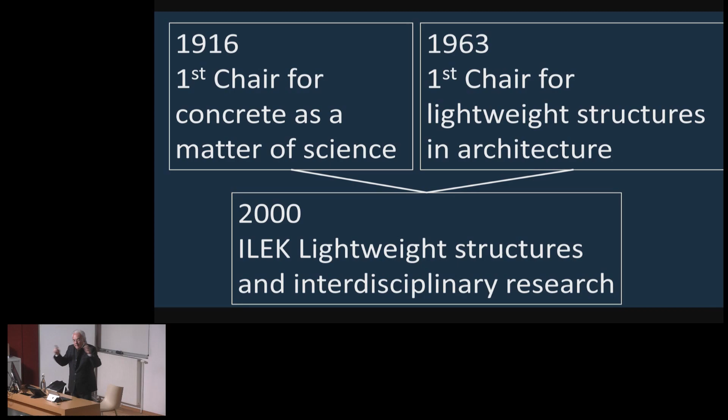It was lightweight, interdisciplinary teams. And what we came up with is the lightest structures you can imagine. These are only a few slides. This is concrete, and the diameter of the holes is maybe 3 to 6 centimeters, and the thickness is 1.5 centimeters. And this is spanning over 6 meters. Super light. You cannot go below that lightness.

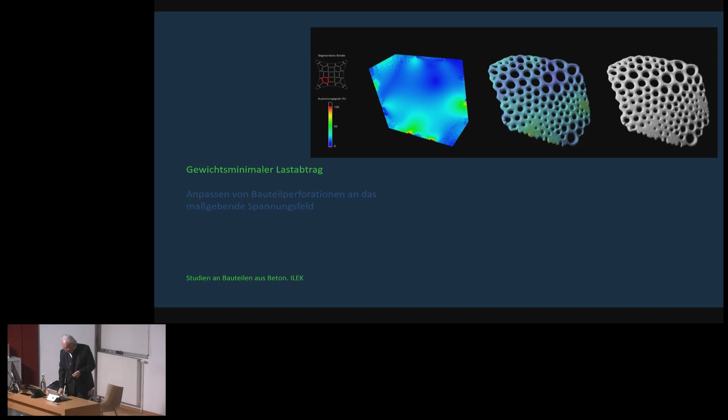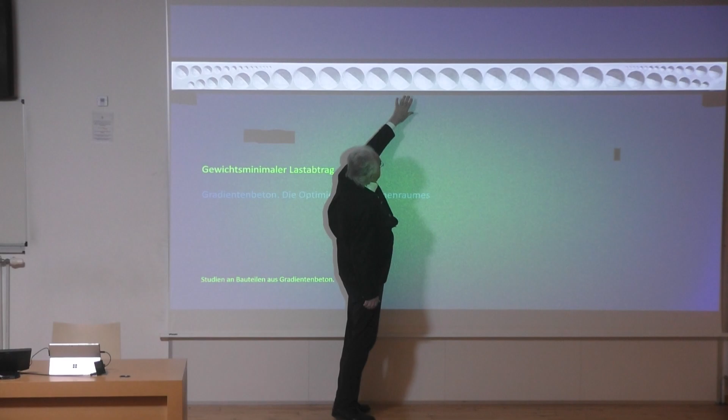Take the idea that there is no material where there is no stress. And then we have a regular slab, for example. So this is, in reality, spanning from here to there about 6 meters. And it's obvious if you have a support there and a support on the other side, that then the highest compression is at center and the highest tension is here. But then the flow of forces changes and the stress level changes.

So we invented holes in a concrete element, but of course no holes produced with inlays of plastic, because recyclability was always a headline. We always design things so that they are 100% recyclable. So we had to invent sculptures, forms made of mortar or cement, which we then lay in the formwork, then we pour the concrete, and the result is then this.

This is 40% of the weight of a regular concrete slab. It is 10% thinner and has the same load-bearing capacity. So it is simple and easy to save half of the material compared to what we find somewhere else. So it is in detail many tests in reality, but if you have these, in that case spherical bodies, you can do them like potato bodies, whatever you want. We made it simple in the very first steps and made it spherical.

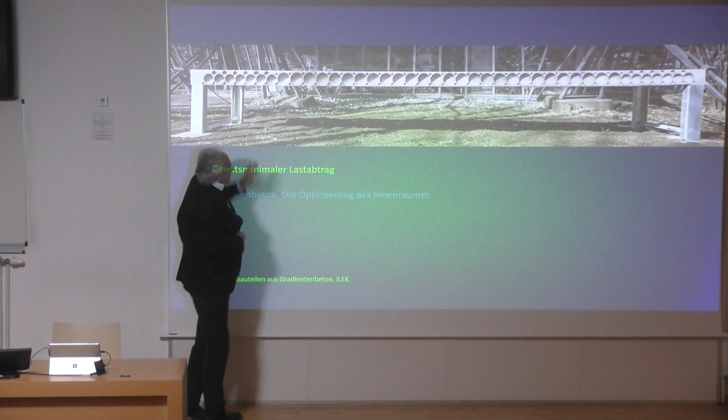But if you have a spherical situation like here, the question arises, what is the densest type of packing of spheres? And then you end in very deep mathematical problems. It's the theory of packing spheres. This is an example. So we need the influence of mathematicians in our research,

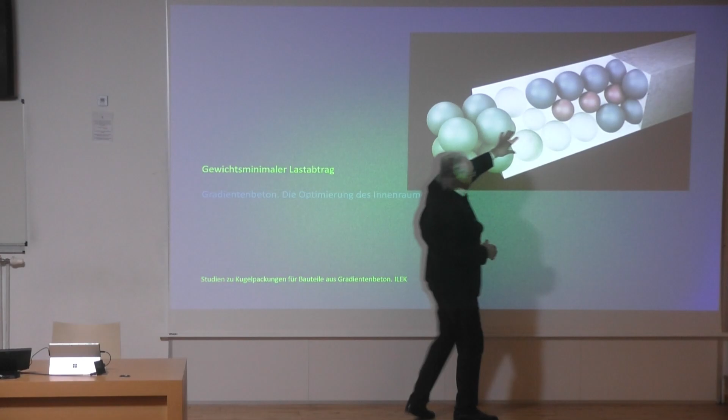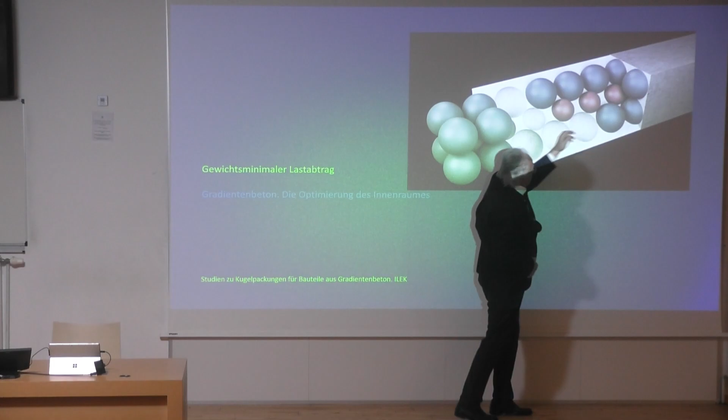and our doctoral students do models then, numerical ones, digital ones, and real ones, in order to understand how we can pack different diameters of these concrete hollow spheres so that later on they form a hollow piece inside, for example, a girder or a plate or whatever.

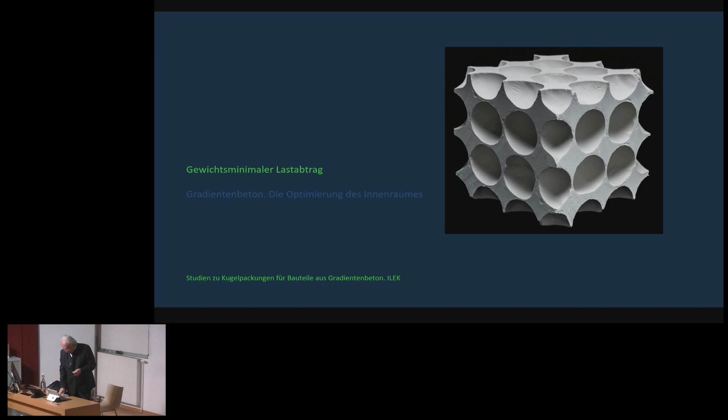And if you cut out of such a concrete element a part like this and give it to a structural engineer and say, okay, this is what we invented, could you do a calculation following the code? Then it might be very difficult, definitely. But we also developed the technologies to do so. So we had the idea, we developed the technology to produce it, we developed the technology to calculate it, and now it is applicable. And we applied it for different buildings in the meantime.

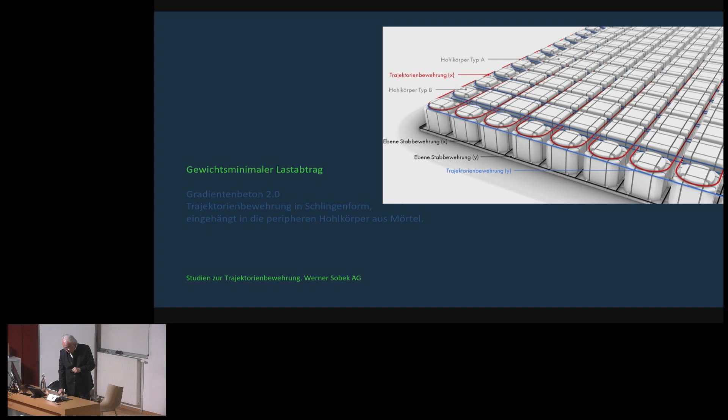This is just a shot in order to show you that these bodies do not have to be spherical. They can take any shape which is a sense-making shape. And then I come to an end in introducing you to the way we thought at ILEK. Imagine if you have, for example, an arch under its dead weight. It's very simple to define the shape the arch should have, so that it is an optimum shape, an optimum geometry.

But if you make the arch thinner and thinner, and if you have an asymmetrical loading, the arch is going to collapse. So this non-symmetrical loading, which is causing buckling and large deformations, is typically the design problem for the engineer, not for the architect. And what do they do? They add mass. They say, okay, if under dead weight the arch is thin, but under unilateral loading it buckles away, then we have to add weight and material so that it stays stable. And this is why many arches are so thick.

Now I said, this is the traditional solution. Never believe the traditional solution. There must be something else. And I said, if we would have a technique which bends the arch in this direction, exactly at the point in time when a unilateral loading drives it to this, then the natural deformation, which is this, and the artificial one superimposed by Werner Sobek, which is this, the sum of both is 0.

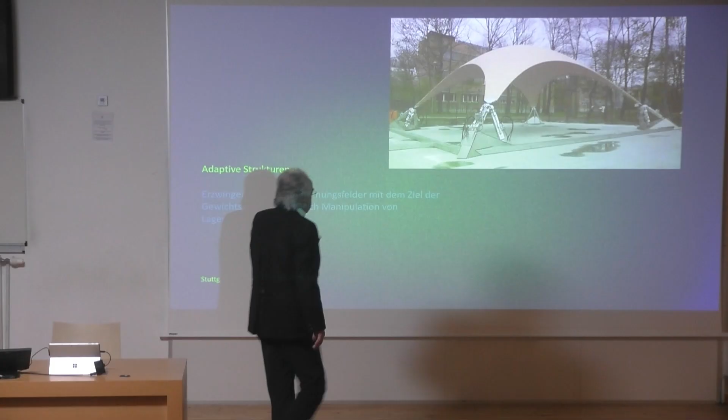So imagine, this is from here to here, it looks scientific. From here to here, 10 meters, each of the supports. So the diagonal is 14 meters. This is from here to the wall at the end. And the thickness is 4 centimeters wood. Regular quality. And indeed, it stands still under its dead weight.

And as soon as we have a unilateral snow load or wind, it would break. It would fail. So what we did is, we had about 10 or 15 tiny sensors below, and these measure strain gauges. They measure the deformation, why the thing is starting to move. From the deformation, we calculate the stress field, which is going to happen. Then we create artificially an anti-stress field, which is causing this, and the sum is 0.

And the anti-stress field we are causing in order to drive it to this direction is by moving these points, the support points, by a few millimeters in the X, Y, Z direction. Under standard condition, this wooden shell would have a thickness of 24 to 30 centimeters. Introducing our technique, we drive it down to 4.

Means we save 80–85% of the material, and we replace the material we saved by energy, which we need from time to time when the snow is falling in a non-symmetrical way to move these support points. But the energy we need is very small. It is very small. So what we did is we replaced building with material by building with energy.

This does not mean that you now should design every one of your buildings with an energy mechanism. I'm telling you that story to make you open in your thinking, that it is not about just adding material when it becomes critical. No, sometimes it is much better to take material away and replace or solve the problem with something different. And this very often makes a lot of sense.

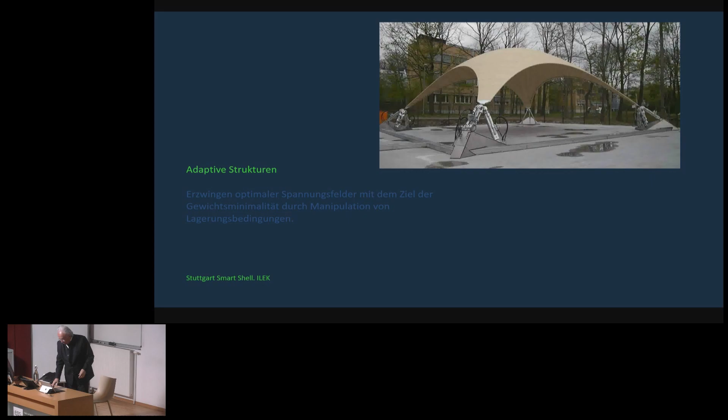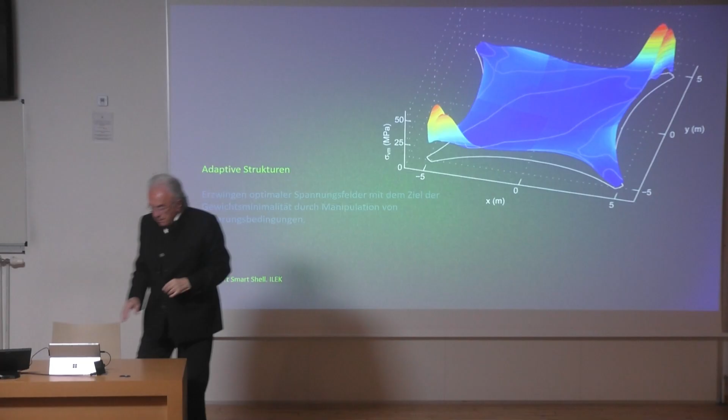Now the problem is by moving these support points a little bit to dampen this stress field and to make it very, very homogeneous, and this is what we do here. So putting a little bit of energy to move a little bit of support point, and the problem is gone. This is not only academic.

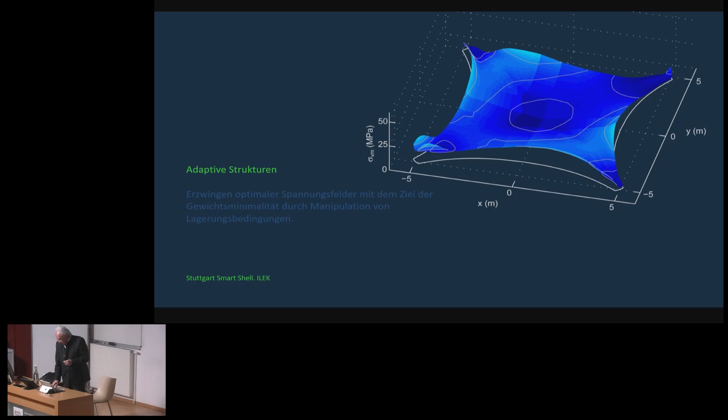As Mark told you, I'm an architect and an engineer, and many projects I'm doing, I need to combine those two things in order to come to a solution. So one of the famous buildings I designed in the last years is this. Now you have to imagine this is 250 meters high. And what is it made for? The building also goes 50 meters down into the soil. So it's a vertical stick of 300 meter length, and it is used to develop and to test high-speed elevators.

Elevators which do not have a counterweight. Because if you have an elevator and a counterweight, you have a lot of material to transport it. It's very heavy, blah, blah, blah. So we said, if the counterweight is the problem, no counterweight. But how can you do a cabin of an elevator without a counterweight and without these long cables? You need to remember the magnet train technology, where the train is running on a track without touching the track.

So we transferred, not us, but ThyssenKrupp, the technology of the magnet train to the vertical situation. And now the cabin is running up and down without touching the shaft of the elevator box, just by electromagnetic issues. So now the following thing is, when they want to get a certification, for example, in France to sell their elevator there, then they typically have to get a certificate by a couple of specialists.

They come to the place and then they want to see the elevator running, they do their measurements, and finally, after doing all these tests, you get a certification to use it in France. But most of these tests are in a still standing tower. Now, if this tower is moving due to wind action, you cannot do the tests. You have to pay all the specialists, but they cannot run the tests because the tower is moving.

So what we did is we remembered the shell, we remembered this action, and we said, okay, in order to keep it away from moving, we can make the tower super fat and super heavy, or we manipulate it. So what we did is, here in a height of 200 meters, inside there's a steel block, 200 tons of steel, which is hanging on a cable, and there's two high-speed electro engines which are capable to move that slightly, only slightly. And we move it in that way, like a pendulum, that this makes the tower standing still.

So we save endless material because we can design the tower very soft with a little material only, and the huge deformations that would occur under wind loading, we dampen them down to zero with this action. Adaptivity is how we call that.

Now the thing happened when everything was done, the ThyssenKrupp engineer said, this is a great idea, we really loved it, machine engineers, so permanently smelling like machine oil, etc. White-faced because they are always working in their laboratories in the darkness of the elevator shafts. And then they said it would be great to set the tower into swinging so we can test the elevator even under earthquake conditions. And then we found out that this is doable, of course. We just have to move that weight in a way that the tower starts swinging.

Then the engineers of my company, they went to the administration of Rottweil, this is where the city said, we need an additional building allowance. We are now starting to make the tower swinging. And this is the first tower in the world which might destroy itself if the software does not work. So this made then the people in the administration white-faced. They said, we don't want to have this. So we had to convince them that it really works, etc.

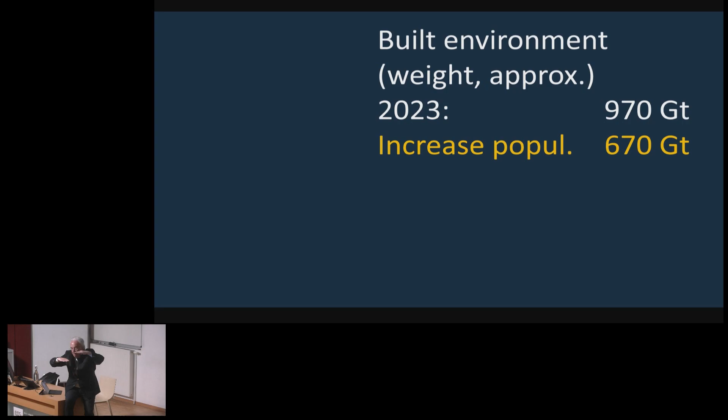That means you have to build the difference between 75 tons per capita in the global south and 330 in the industrialized countries. So if you take that difference and multiply it with 6.6 billion, then you come to the number which I call catch up. This is 1,700 billion tons.

So if you add that up, that would mean if in the year 2050 everyone would like to have the building standard of a Western country, then you would have to build the existing world 2.3 times in addition.

You don't need to study mathematics to do these calculations. You have to ask the right questions. Nobody told you this. I asked the question, why? No scientific magazine is talking about it. And this is so simple. Just multiply the need of material or the need of food with the number of people and compare it to what exists. And then show the difference to what is needed. And then you become much wiser.

So this is how we work at ILEK. We talk to population researchers. We say, are these numbers right? Are these wrong? What is your estimate? We talk to material scientists, to economic people about what the industry is producing in building materials in China and Japan, somewhere else. And then we add all these numbers up and we come to these conclusions.

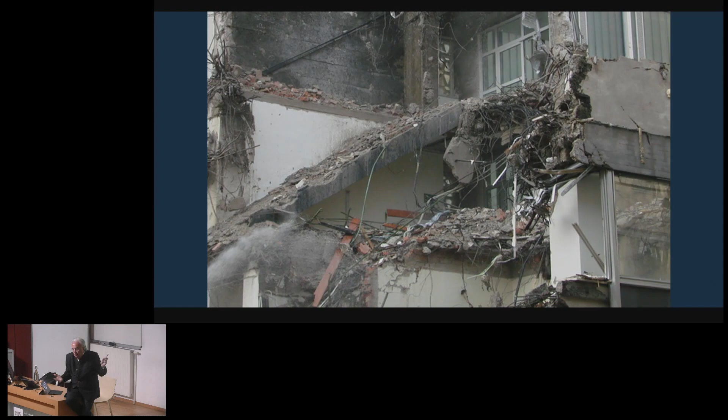You learned already a lot about this, as Mark Hyman told me, about avoiding this waste. How can you avoid this waste? There are two simple techniques. Not to tear the building down, to reuse it, or to build in a way that this type of waste does not occur, meaning in a recyclable technique. I call that compose and decompose. Bring the different materials together in a way that it is easy to decompose them and then to recycle the different single quality materials. But if everything is bonded and glued together like here, recyclability is more or less zero.

So not tearing the building down, reusing it, is something we did relatively often. Especially when it comes to a weapon factory where they produced munition. Me being an anti-militarist, it was quite clear that I had a lot of fun doing this, and we turned this weapon factory into an institution of arts, a school, the Center of Arts and Media in Karlsruhe. So not tearing it down, reuse it.

And the idea of recycle means build in a recyclable way, which we typically do not. The car industry is obliged by law in Germany that their cars have to be 80%, 85% recyclable. They started doing this in the 80s of the last century. The building industry has no idea how to do that. Therefore, we started already 30 years ago to plan buildings and build them in a way that they are recyclable. Exactly with these techniques: easy to compose and easy to decompose.

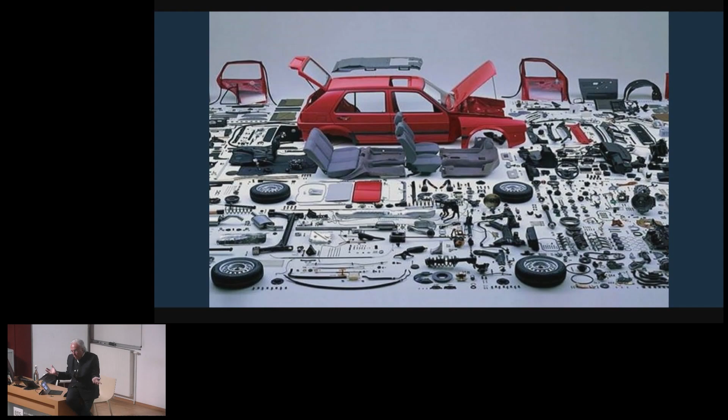And the shining example of this is the house I'm living in. Some of you might have seen that. This is my private house. It is super light because the dead weight is 16% of a building of the same size built with traditional technologies. So I saved 84% material. I do not need energy from outside because we produce the energy ourselves. It's all solar and electric. And the house has no chimney, so it is zero emission in the use phase.

And it's 95% recyclable, because all the joints are simple bolts, you can see them. You take the bolts out and the house falls apart. There is no multi-layer gluing or anything like this. Many questions arise. So where is the light switch? If you have a light switch in the wall, then there's a cable in the wall going to the light switch. Typically not reusable, difficult to recycle. So we said we have no light switches. It's very simple. So how do you do that, having no light switches?

You have a handheld, which has the big advantage that if you are on floor number 4, you can switch on the light on floor number 1 without running downstairs. Or you can open all the windows with the handheld. Now this is trivial today, but this house is 25 years old. It was not trivial at that time.

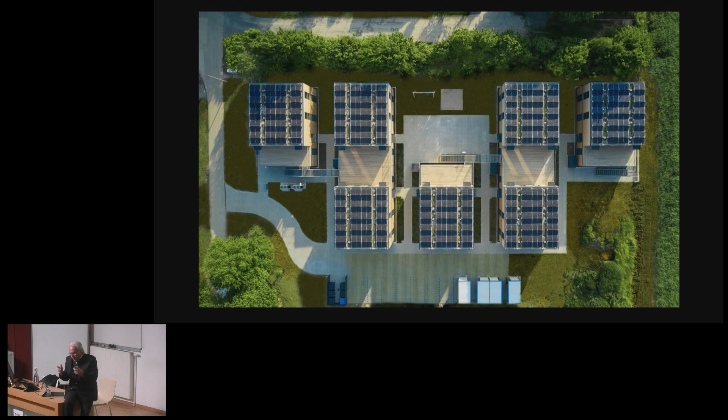But the main thing is the emissions. And then, as I told you, there is no law, no legal activity to reduce the emissions in the building industry, only the energy efficiency thing. But the built environment stands for 52% of the emissions. 38 comes from buildings, and about 15 comes from infrastructure.

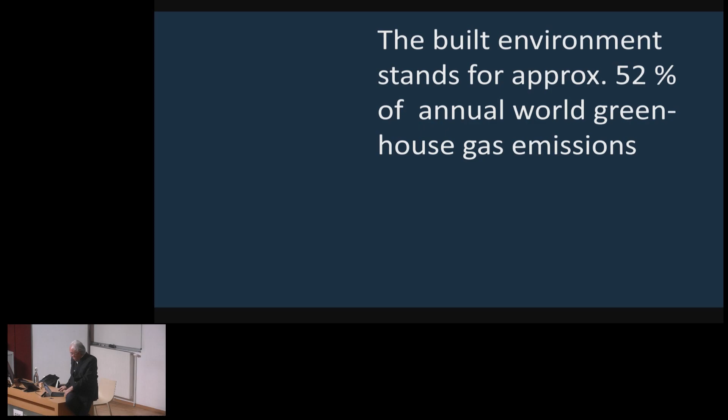Now, in infrastructure you don't need to heat or cool something. These emissions are the so-called gray emissions, which occur when you produce the materials, transport them on site, and erect the building, be it a bridge or a house or whatever. So this is the gray. And then the emissions in the use phase come mainly from the buildings, heating and producing warm water. We can roughly estimate heating and cooling, out of these 52, at 25 to 30, depending on the country. But the gray emissions of the buildings are a remarkable number.

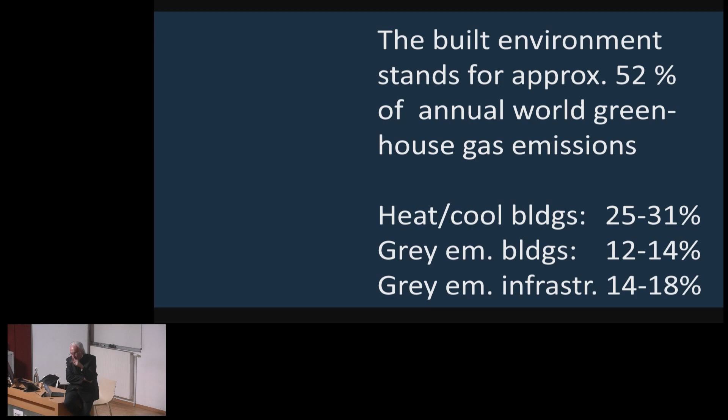This is 12 to 14. And the same is true for the infrastructure. So producing cement and steel and transporting all these materials is causing a lot of emissions. And these emissions are the problem. And what problem do they cause? Okay,

we have these greenhouse gas emissions, which is mainly CO2. There is also some methane and some N2O and some fluorocarbons, but the main topic is CO2. Now, what most people mess up is cause and effect. They say, I'm fighting against global warming. You cannot fight against global warming. You cannot fight against the effect. You must fight against the cause, and the cause is the emission. So the cause is here.

And this is causing an effect, for example, an inhomogeneous atmospheric warming. And this is causing, in a next step, droughts. And droughts are causing, in a next step, decreased crop yield. Less wine, less apples, less wheat. And if you have a decreased crop yield, what does this mean? If your harvest is low, then people have hunger. And if people have hunger, the society either gets destabilized or the people get violent. And then your society falls apart.

So there is a reason, which is the cause, the Ursache, which is the emission. And then this is spreading out like a virus on multiple different levels, causing effects and effects, secondary, third, fourth level, fifth level effects. Yeah? The same inhomogeneous oceanic warming because of CO2. This is reduced fish harvest. What does this mean? Okay, some people get out of work, the fishers. If they get out of work, they either get violent or they start migrating.

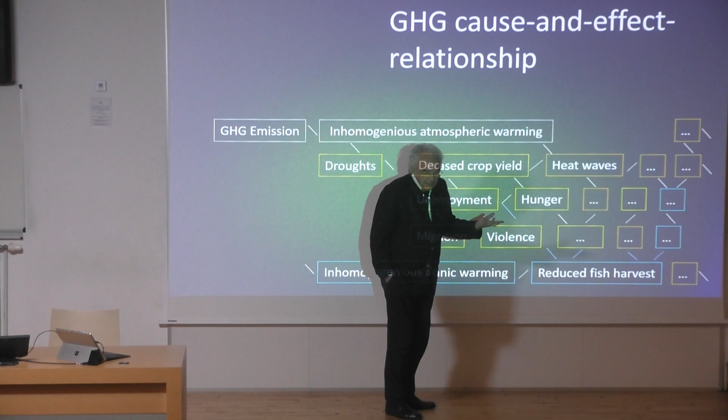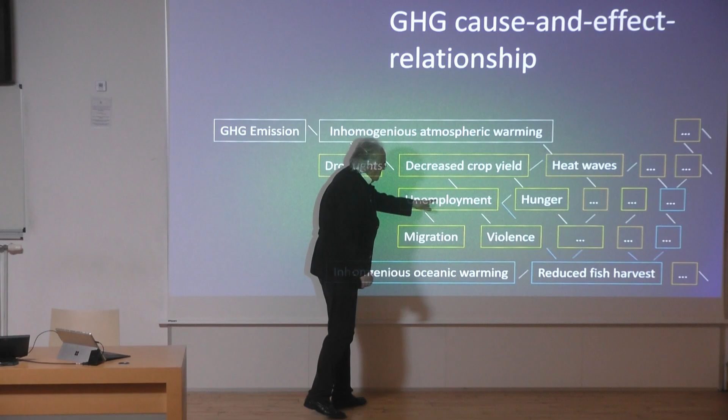If they migrate, they arrive somewhere else and say, I'm a European, I want to live here. I have the right to live here. And then you have to build a house for him, and a school for the kids, etc., etc. That means the material thing comes again. So this is what you have to understand. You cannot fight against this and not look at this. You have to look at this, and then these problems grow smaller. If you solve this, then these problems are mini.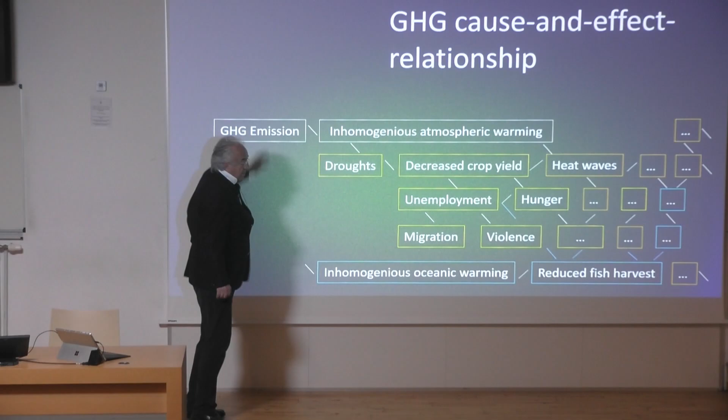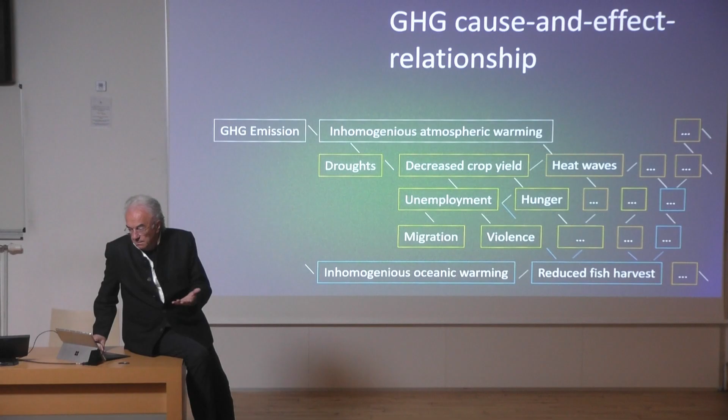But nobody is solving this, because the greenhouse gas emissions are, despite the Paris Treaty, not sinking, they are rising. So the problem is getting bigger instead of smaller. What should we do? Continue? Yeah.

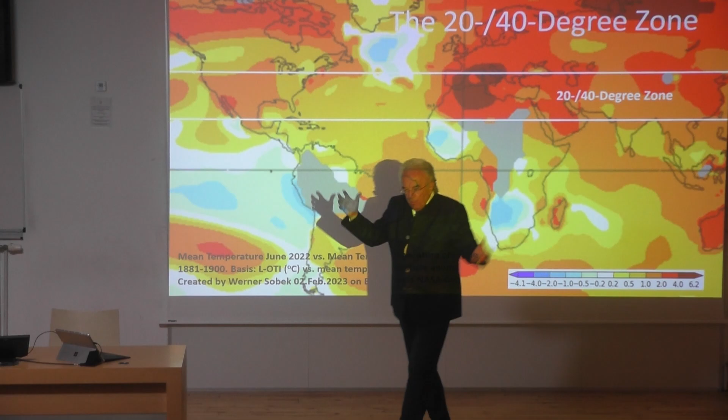Look at this. What you learn is, okay, what is global warming? It is 1.3 degrees, 1.4, blah, blah. So what does this mean, 1.3 degrees? You know, 1.5 is the Paris Treaty. We should not exceed 1.5. But what does it mean, 1.3?

Okay, scientifically spoken, every day at all the meteorological stations all around the world, you measure the temperature several times. Then you make an average out of it. So this is the average temperature over the world today. 50,000 meteorological stations, add up their temperature data, divide it by 50,000, this is the average. You do this every day. Then sum it up over 365, divide by 365, then this is the average day per year all over the world.

So it's the average of the average of the globe in a day over the year. So the number means nothing. It is a certain indicator, but not more. This is good, important to know. But the 1.3 is what? Now the IPCC is defining the 1.3 as the annual worldwide average temperature in 2024 minus the worldwide average temperature of the years 1850 to 1900. So this is the base reference temperature, and then you look how much it changed to here. And then the result is 1.3.

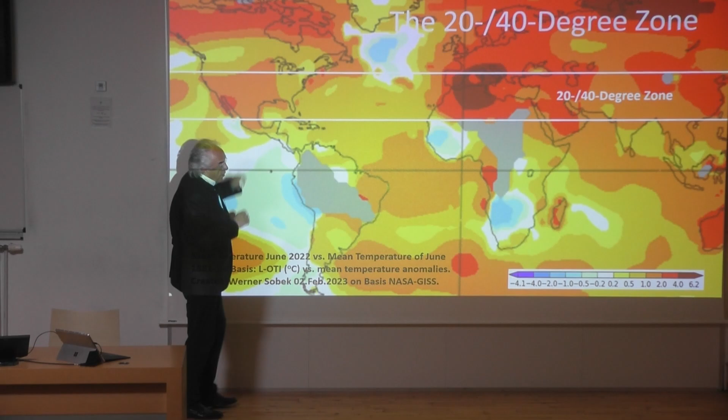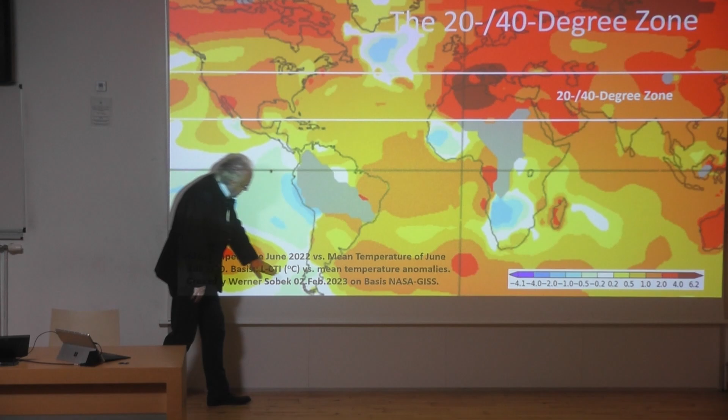For 1 month, so this is the difference between the period of 1881 to 1900 and 2022, June, and its distribution in this month all over the world. And what you easily find out is that it's getting hot and hotter the more north you come, that the Mediterranean area is really, with 6 degrees delta, hurt dramatically, but also the northeast of Siberia and Canada.

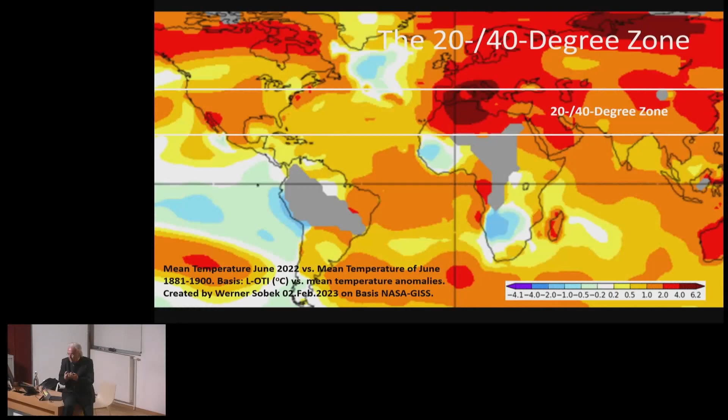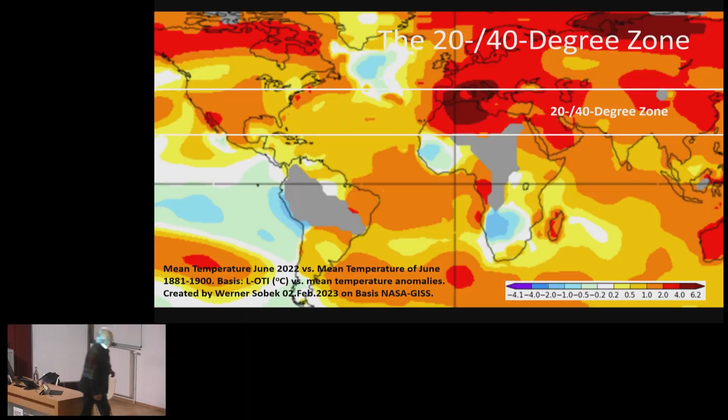Nobody's talking about this. Here in the southern part of France, in Italy, in Spain, you really experience that, because the crop yield is decreasing, the wine yield is decreasing. This is the result. And there are areas where you have more or less nothing going on, like here in the oceans, it's even getting cooler, etc. But now we look at this band here, where most of the action happens.

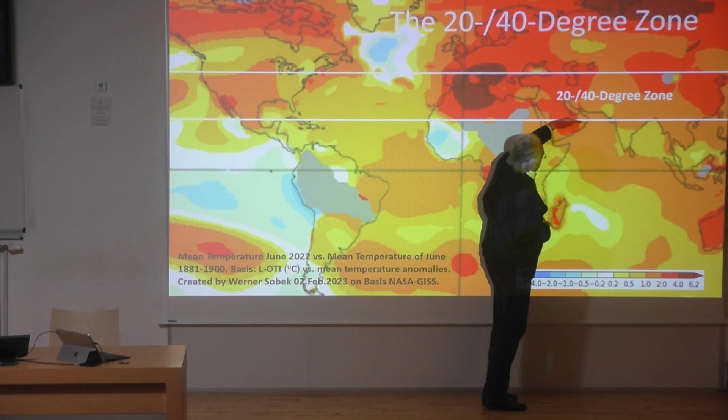And we ask the question, where is the food produced on our planet? And it is exactly here, what I call the 20 to 40 degree zone. I introduced this 20 degree north from the equator to 40 degree north, this tiny strip, which is from the southern to the northern end only 2,200 kilometers. You can drive that with your car in 1 week.

Very, very small, is where we have the highest temperature anomalies, where we produce most of the food, which will be affected by those anomalies, and where the majority of the people on the planet is living, 4.5 billion. Means the entire problem is condensed in the 20-40 degree zone. This is what you have to understand.

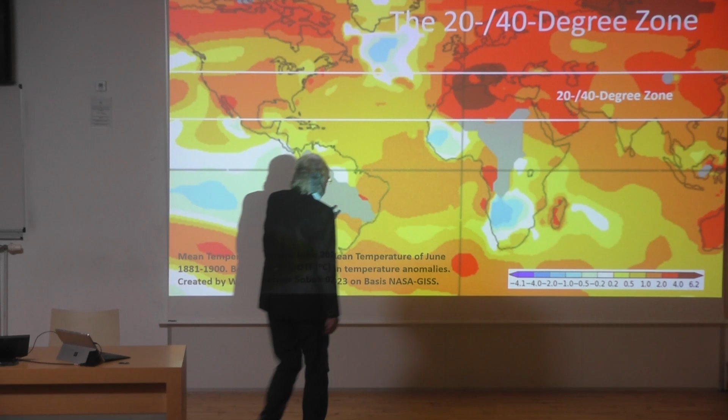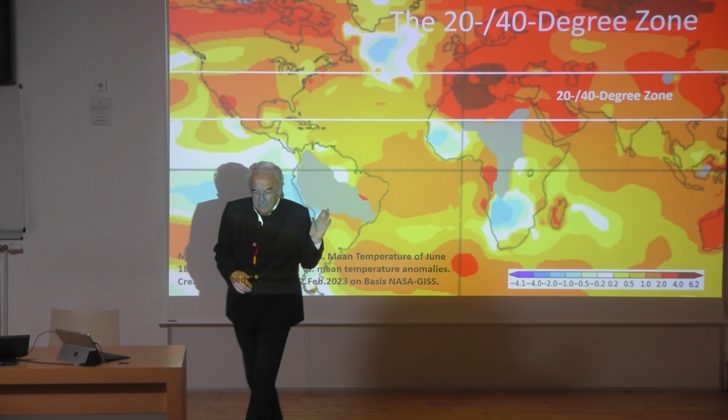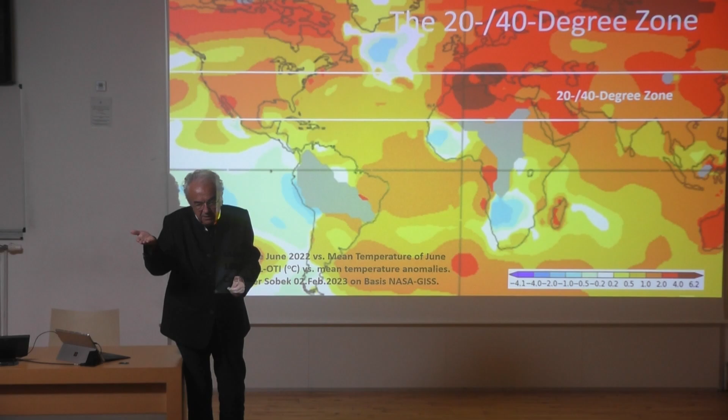And it's clear that when it becomes uninhabitable here, the people will not migrate to Africa. Because the delta is small here, but the absolute value is high. What we see is the delta values compared to former times. In Africa, it was always super hot, so it's not an advantage if we now have only 41 compared to 40 degrees in June, because nobody can live there. But here it is remarkable.

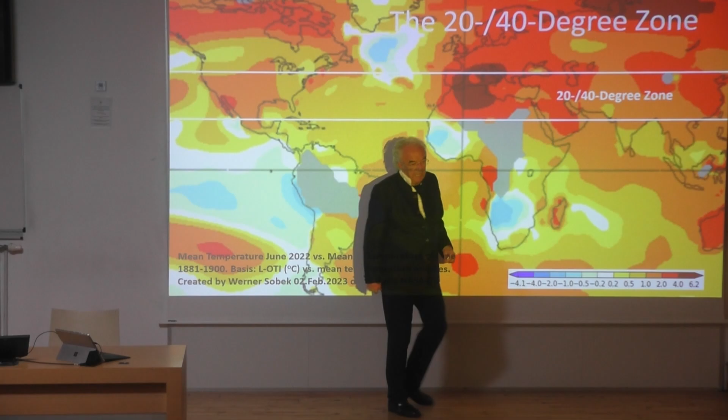If you have an average temperature of, let's say, 34 instead of 28, this will yield remarkable crop yield loss. And then you produce less wheat, and then you don't have enough to eat, if you distribute the food in the way the people do it. Maybe another story in order to give you a way of thinking.

When the Ukraine war started, the Russians have been accused to have a blockade on Odessa, and there are 30 million tons of wheat. And then the entire media in the world said, hundreds of millions of people will die in the eastern part of Africa, Somalia, Ethiopia, etc., because they don't get the wheat which is in Odessa, and the Russians don't let them out. So it was, at least in the German media, Putin is a mass murderer and whatever it was.

And I was obviously the only one in the Republic who said, how much wheat is on the table? Not in Odessa, on the world. What is the annual wheat harvest? What would you estimate if you take the entire harvest of wheat divided by 365 days, divided by 8 billion people, then this is your personal rate in a basic democratic type of distribution. How much would you get?

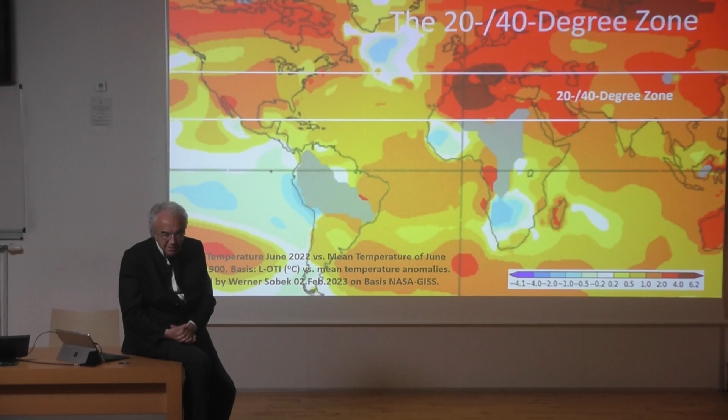So where does the wheat go? Into the stomachs of pigs and cows. More than 60% of the wheat production is fed to animals. This is why we have a shortage and the prices shoot up. If we think clear and we say stop feeding animals with this very important wheat, then the problem is gone. There's enough to eat for everybody today. Enough. It's a question of how you distribute it, and this is a question of how the society functions.

Now we learned about these degrees, etc., and we learned a little bit about the importance of emissions. Now in Germany, many people say, what can I do? It is the Chinese. The Chinese, there are so many, they are emitting like hell. I say, yeah, okay, if you compare Liechtenstein to China, Liechtenstein is always the winner. You cannot compare Germany with China, you have to compare person with person. This gives you the real impact.

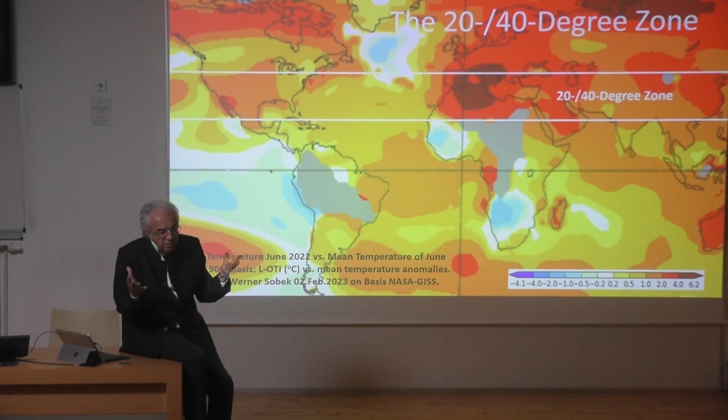So if we compare person with person, then the average is 5 tons CO2 per year all over the world. The US has 16, Germany 9, China 7, Africa less than 1. The planet may take, depending on whom you ask, 2 tons. It can absorb these emissions with all the forests and with the seas, but not 5.

So if you would do a ranking and a podium, number 1 would be, let's say, the only population which really takes care of the planet: the people of Africa. The rest are polluters. They are the shining examples.

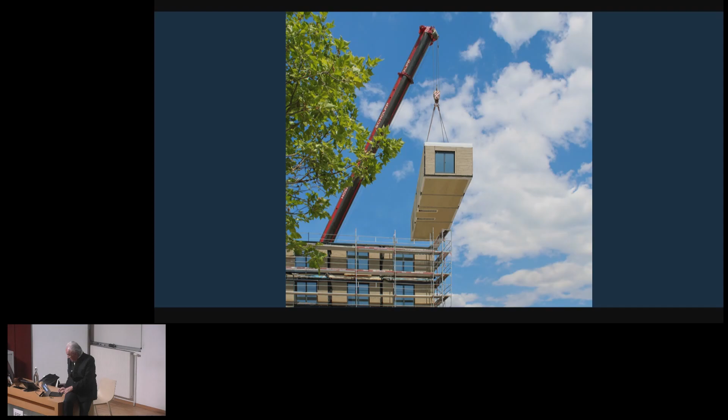So we further developed these techniques which we applied in industrial production. We produce modules completely equipped and pre-tested. So we guarantee once the module comes around the corner on a truck, 60 minutes later you might move in. The water is flowing, electricity is there, the light is working, everything. And this is high-speed building, which looks great.

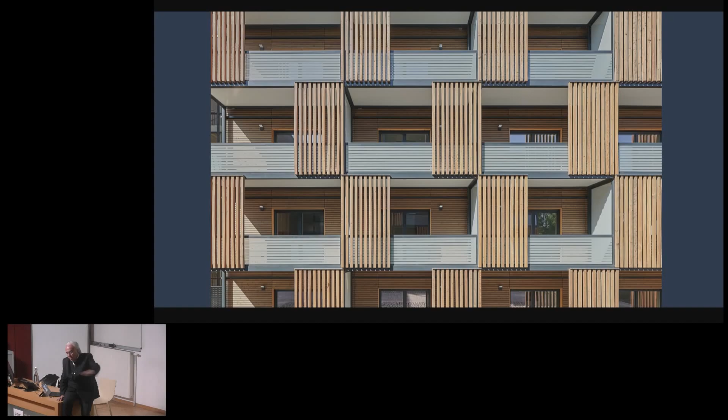We installed one level in one day on this 340-apartment building. So one level having 10 apartments in one day, 5 stories in 1 week. So we built 50 apartments, turnkey to move in, in 1 week. No problem. Just a combination of minimize material, use recycled materials, make it recyclable, avoid emissions in the production time, have no chimney, 0 emission in the use phase.

Energy, why should we save energy? If we have enough solar energy, it's fine. The same is true with my glass house. This is an energy waster. I need energy like hell in wintertime. Yeah, so what? I have 160 square meters of photovoltaic. I have a heat tank. I have an electricity battery. I don't need the public grid. I can cut off the house for a week, even in wintertime, from the public grid.